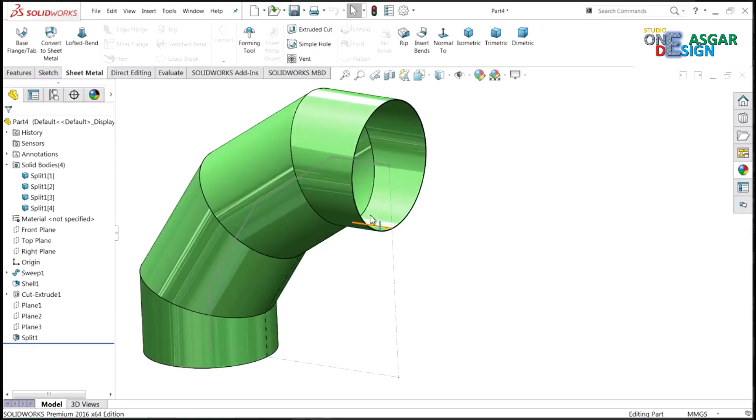CAD tutorial. Today we are going to design a simple sheet metal elbow, and later we will divide this elbow in 4 parts. We will shape these parts separately in sheet metal form, and then you will get this flat pattern. See here, see this second one, and this. Let me show one more, this one. So this type of sheet 2D file we will get.

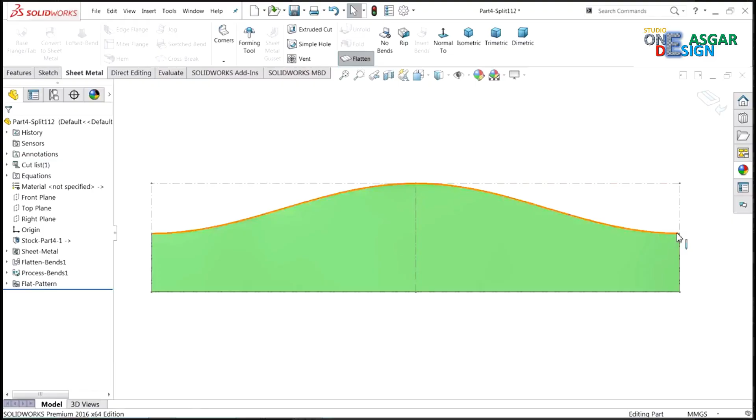We will get this part separately, and later we will convert this part into a 2D file, so that you can easily cut these parts, and later you will roll and weld it and form an elbow. So let's start to make this simple elbow. Now let's start to create the sheet metal elbow in SolidWorks. So first we will make a solid body. So let's start with front plane, sketch, and here we will make some geometry.

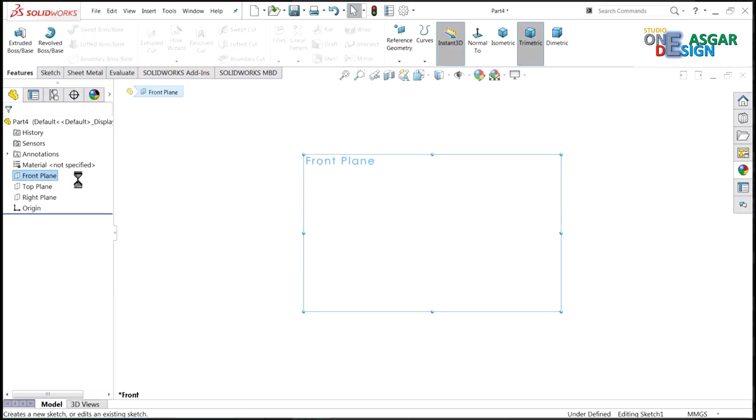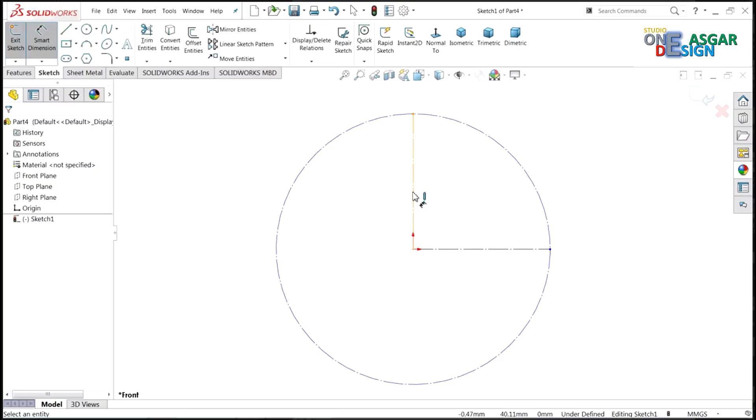Let me choose circle. I'll draw a circle, and here select for construction purpose. Okay. Now let me choose line. Draw one quarter circle. Exit. Now select both the lines and choose for construction purpose. That's it. Smart dimension, 1000 millimeter. Okay, it's by default.

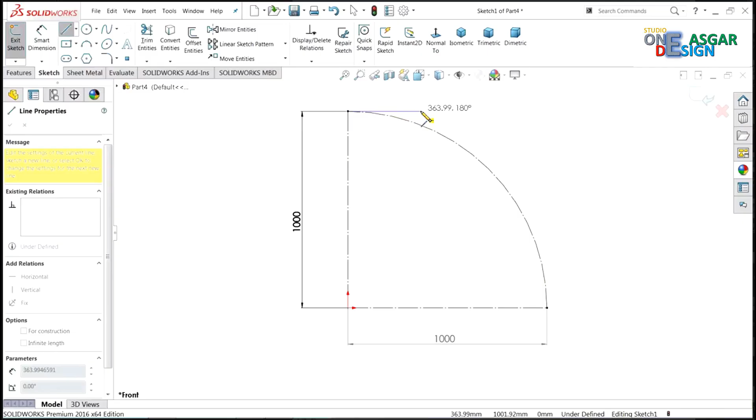Okay, power trim, and I'll choose here power trim and trim this one. Okay, now let me select line here. Now we will define the geometry of the elbow. So we will make a simple elbow. 1, 2, 3 and 4. 4 joints in elbow. Make sure it is vertical. Select both these lines and make equal. Now the same, select these 2 lines, equal.

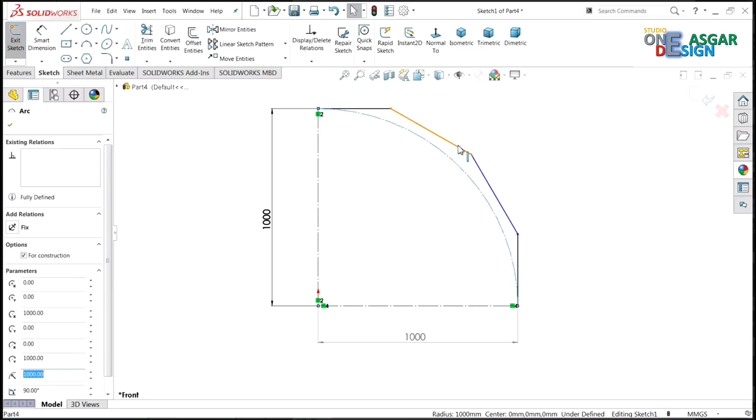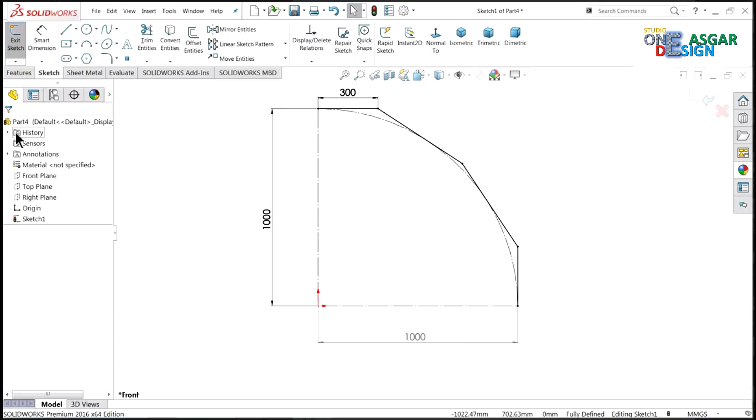Select arc and line, create relation tangent. The same for the second line, arc and tangent. Okay, now let's define the dimension. 300 millimeter. Now this is the simple geometry, or you can say this is the profile path. So simply exit. Okay, now let me select here top plane, sketch.

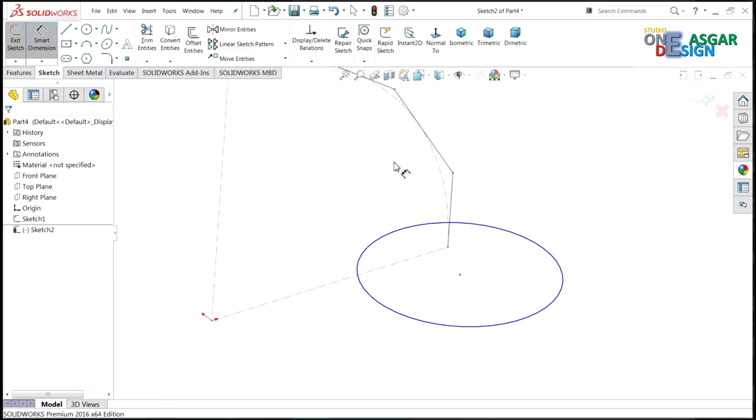Now this is the top plane, so select circle, and here draw one circle. Exit. Smart dimension, and let's define this diameter. Keep 800 millimeter or anything, it's not a big deal. Now I'll choose this end point of this line and center point of circle and make relation coincident. Now see, the drawing is fully defined. So path and profile both defined. Simply exit.

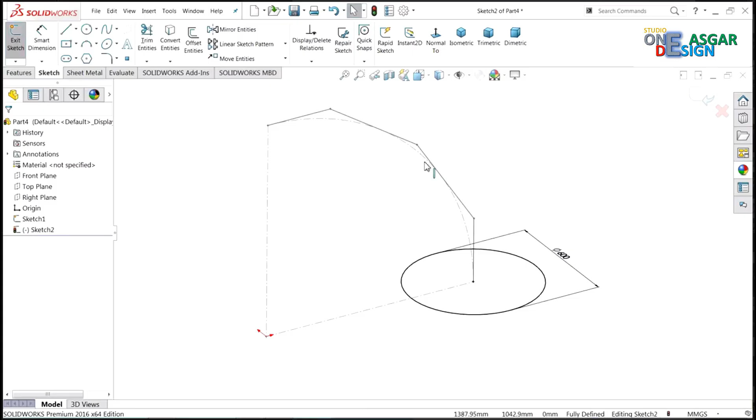Shift to boss base command. Here see sketch 2 selected. Now here select path. Now you can see the preview of this drawing. Okay. So this is the solid body. Now we will convert it into sheet metal. How we will do this? First we need to divide this body in 4 parts. So first let's make shell. Thickness we will keep 3 millimeter.

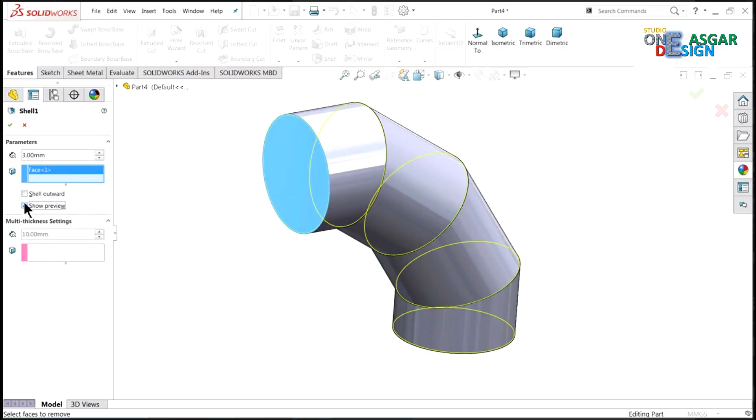Select this, show preview, select OK. Now see, the wall became 3 millimeter thick. Go to document properties, image quality. Okay, the image quality is already high. Refresh. Oh, that's fine. Let's define this appearance. Okay, at the end we will define it.

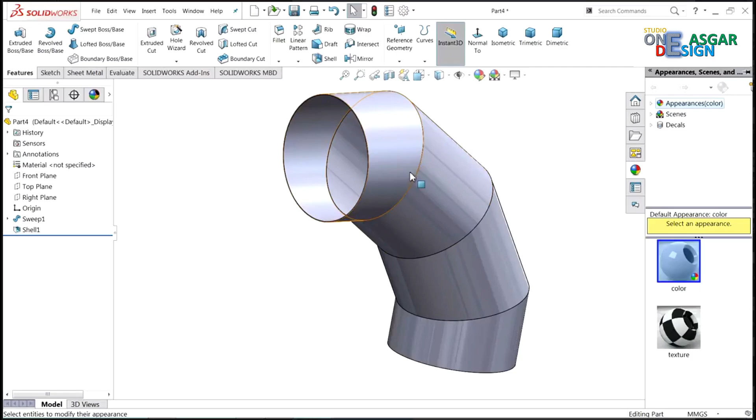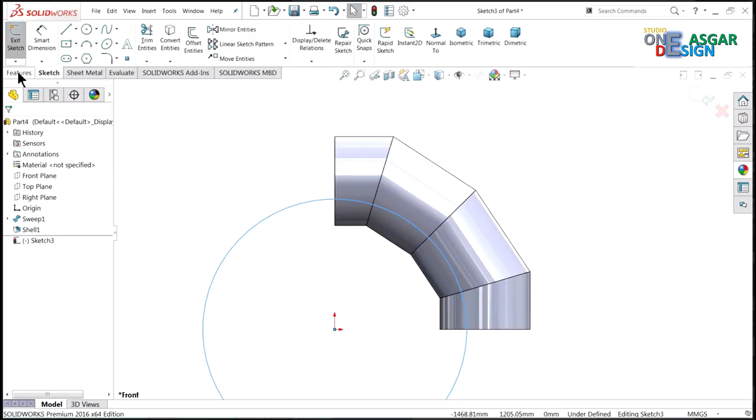Now for sheet metal purpose we need to cut this body. So select front plane. This is in mid. Sketch. Select circle and draw one circle. Make sure it covers the outer line. Okay, and select extruded cut. Now see, keep end condition here mid plane, and thickness we will make only 1 mm. So a small gap we need.

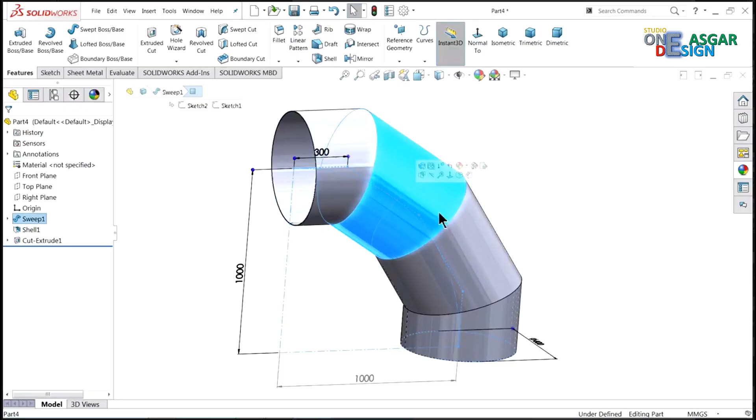Okay. Now look, see, the gap is created. So still this is not in sheet metal form, it is still a solid body. So we need to first divide these four parts. So what we will do, we will create planes. I'll select this, see this circle and plane created here. Okay, again choose plane, and this time select this circle. Now see this circle, plane created.

Okay, again select here plane, and this last one, see, only select the edge and it will show you the direction. Okay, now here we created three planes. Why did we create these three planes? Because with the help of these three planes, we will divide this body in four parts. So this time, right click command manager and choose here direct editing.

Once you go to direct editing, you will find the command Split. Now here you need to define the surfaces which are going to trim this body. That's why we selected these three planes. So select these three planes.

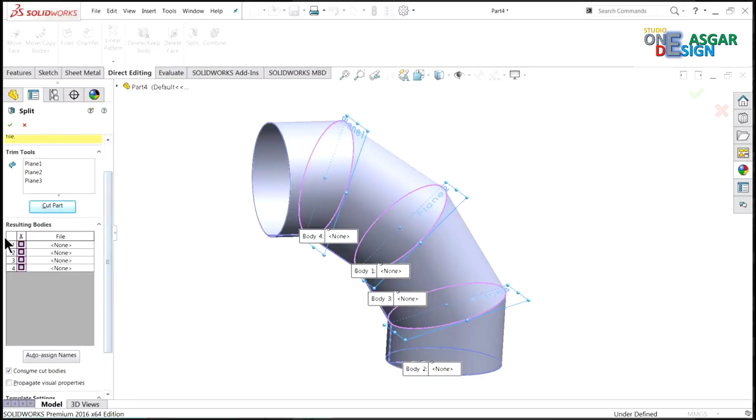Now here select Cut Parts. Now see the resulting bodies, there are four bodies going to be defined. Select these four bodies, 2, 3, 4. Uncheck this Consume Cut Bodies, otherwise it will disappear.

Okay. Now you will see one option on your left hand side in the tree manager, Solid Bodies. See 1, 2, 3, 4. This body is still not yet converted into sheet metal. So let me hide these planes. Now it's time to convert this body into sheet metal. So how will we do this?

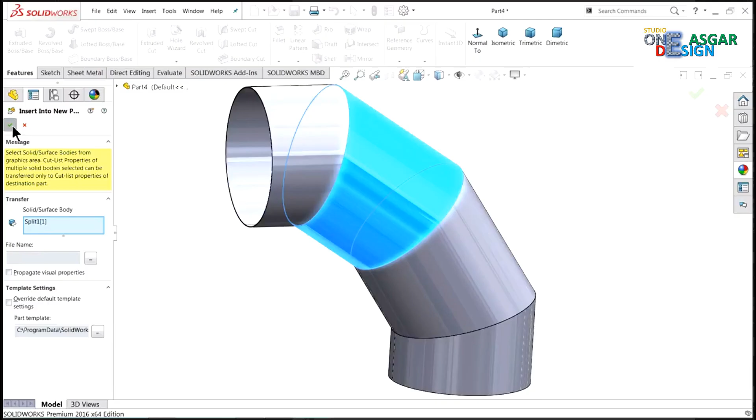Select part 1, right click and here select Insert into New Part. We will take it to new geometry. It is asking you for split body 1. Okay, now see, now it is asking to save. So create a folder, sheet metal elbow. This is part 1, save.

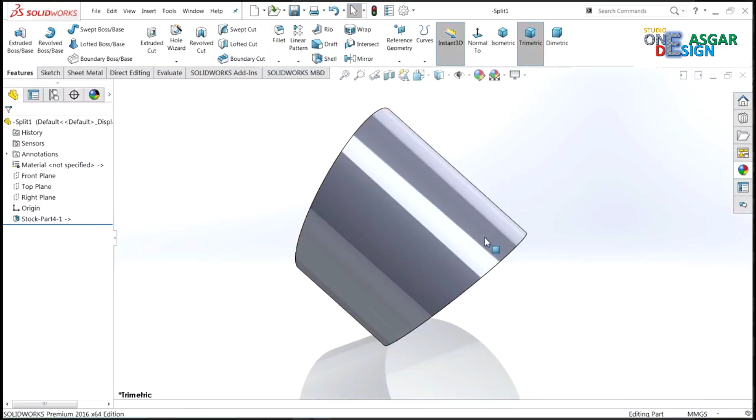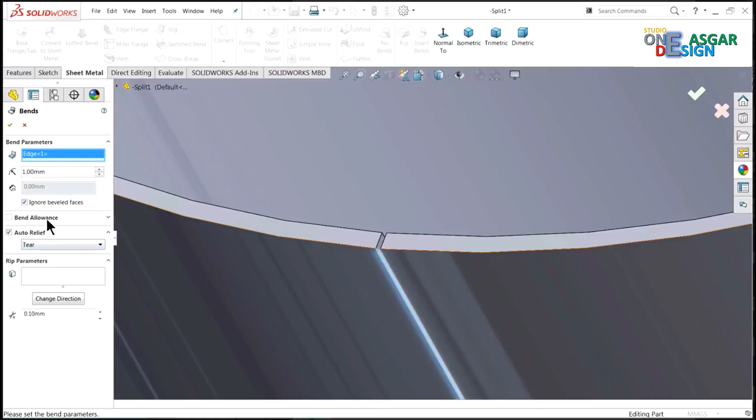Now still it is not converted into sheet metal. So go to Sheet Metal and here you will find the option Insert Bends. We need to insert the bends, then only it will convert. So select this outer edge, see, edge selected, and this is the radius, selected by default, and everything as it is. Okay, now it is converted into sheet metal.

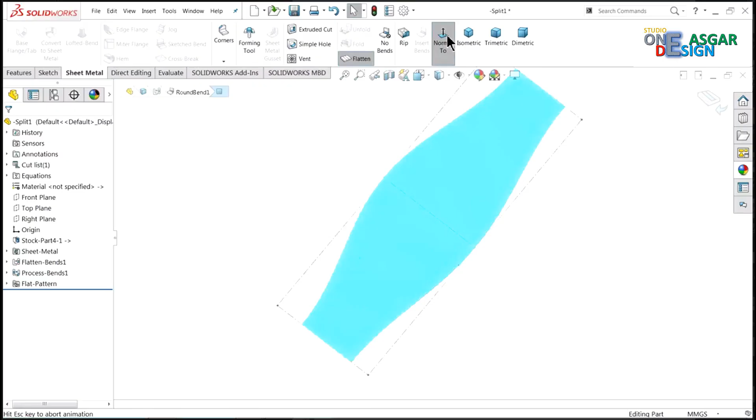Now you can select here Flatten. Select this face, Normal. Now see, this is our main body. This is the flattened pattern. Now it's ready to use. You can directly insert this body in any turret punch or any cutting machine. You can cut it, roll it and build it. So this is a very important tool for the ducting industry, sheet metal.

Now if you want to save this one, how will you save it? Select here Save As. Save as DXF. Save as DXF file. Now on your left hand side you will see DXF drawing file, sheet metal and geometry. Keep checked. Okay. Now once you select OK, a window will appear.

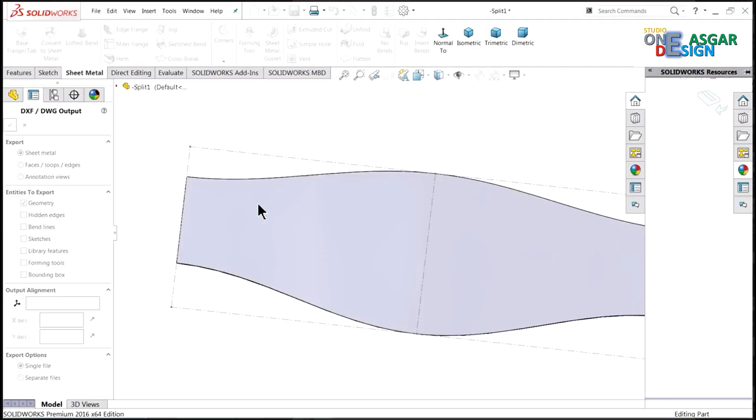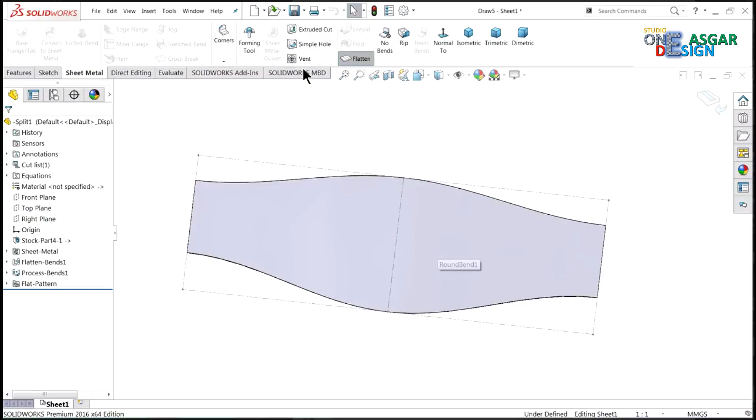Now see, this is your 2D drawing going to save in your destination. Select Save. Now this 2D file is saved. Now you can use this 2D file and do your work. Or you can even directly take it to make a drawing, landscape. Okay. Now here you will get many options, left hand side, right hand side. I'll choose flat pattern view, drag.

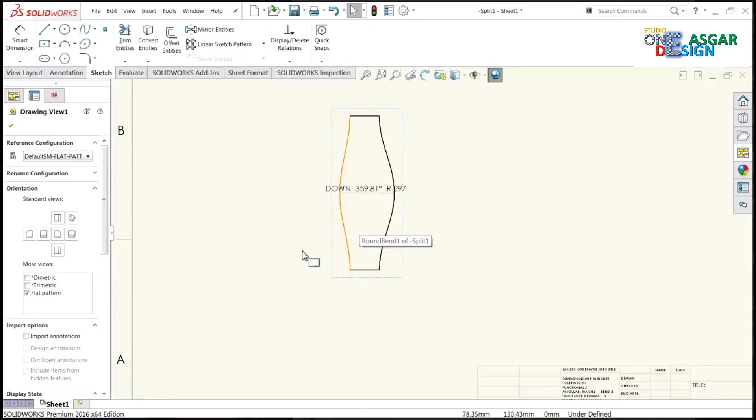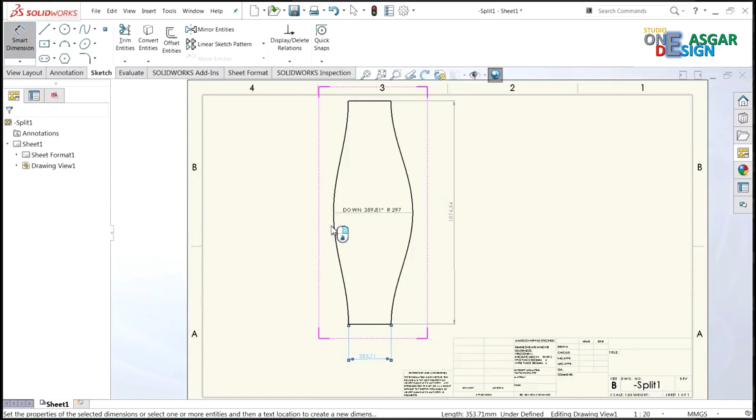Okay, so let me do this. Okay, now that's fine. Let me define the dimensions. Now this is the center line. So this is your 2D file. You can save this 2D file also. Save as drawing file. Save. Save all.

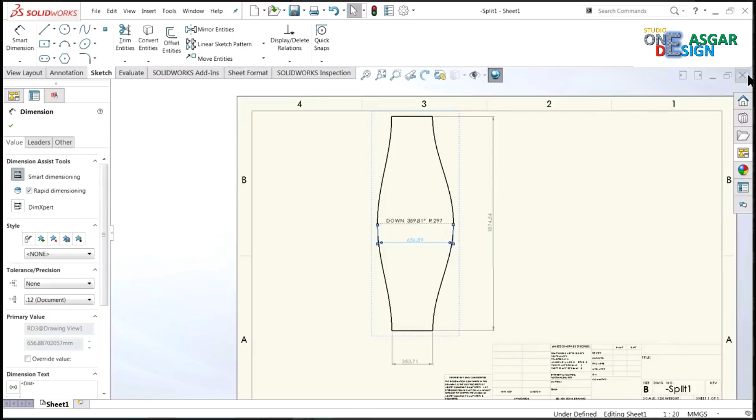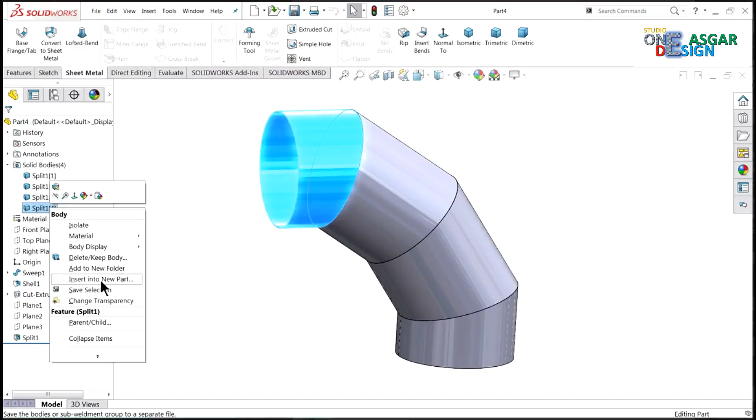Now cancel this. Unchecked. And cancel this. Save all. So how do we save this one part? Now let me choose the part. Okay, this one. Insert into New Part. Now see. Now again you need to save this split part 4. Save.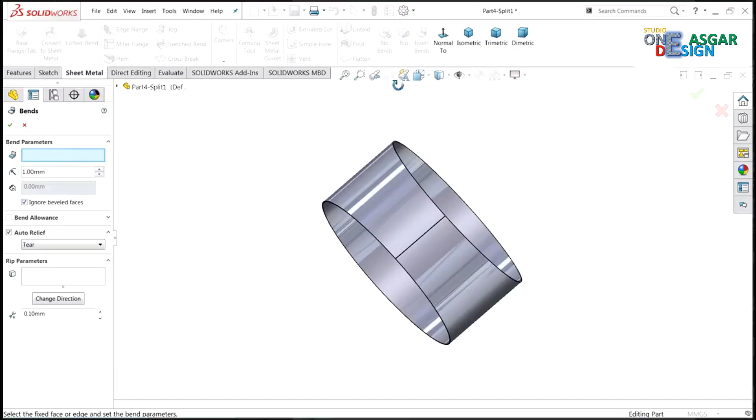Now go to Sheet Metal, Insert Bends. Now let's choose one edge, not a face, choose an edge. Okay. Now it is converted into sheet metal. Just select Flatten. See. So this is your flattened pattern.

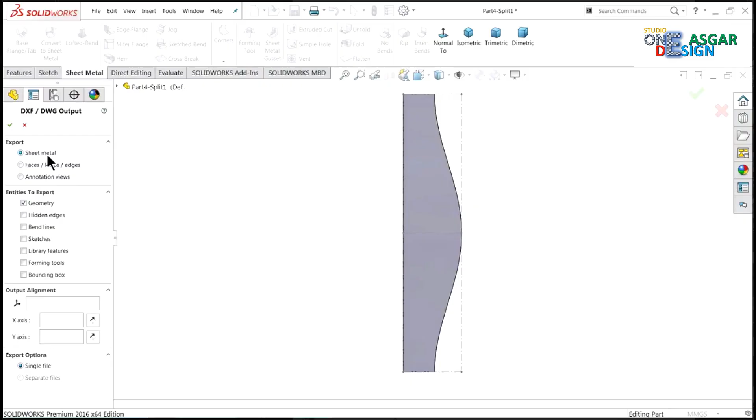Now you can simply save. Save as. Choose here drawing. Select sheet metal geometry. Okay. Now this part is also saved. See, save. So this is the simple way you can convert any solid body into sheet metal, and you can make the 2D files for any of these parts.